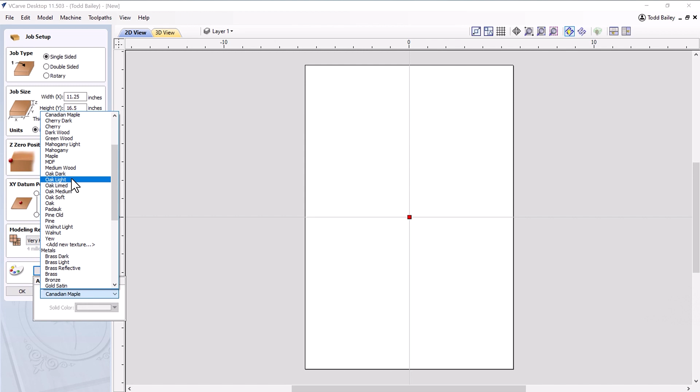Make sure we use a very high resolution, and we chose a material suitable for the material we have. We've already downloaded and installed the 12 Days of Christmas project, so here are all the bits for that.

We'll double click on the wall plaque, and scale it up just to fit inside of our job space. Next, we're going to start to lay out what we want to be in the middle of this plaque.

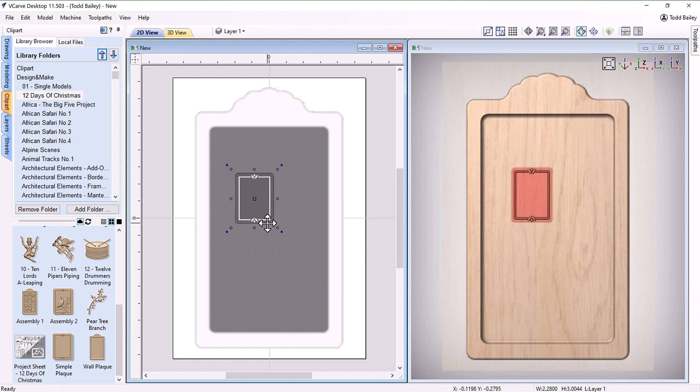So we're going to double click on the simple plaque. We're going to size that down to a point where we think we can fit about 12 of these inside that recess space on the large plaque. And that seems about right.

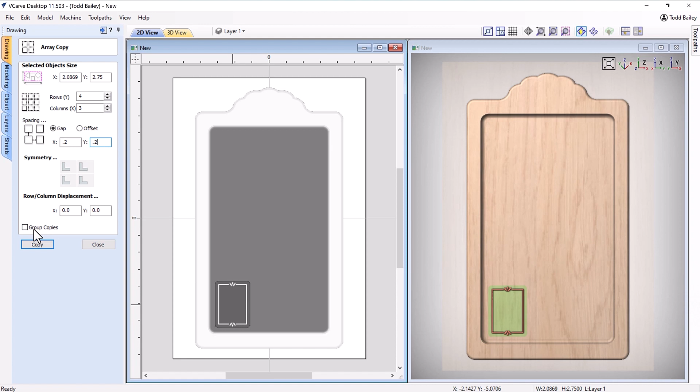So we're going to move it down to the bottom, and use our array copy tool to create a nice array of these. Make sure we group those together, and we'll click copy. Now there we have them.

Now we just need to center those on our plaque. First, we're going to select that, and make sure that it's set to an add component. That way it's actually proud of our plaque. We can center that into our job space, and then we're just going to drag it down to what looks to be about right in the center of our plaque.

Go ahead and change the shape height a bit of that, just so it looks like it fits in there better.

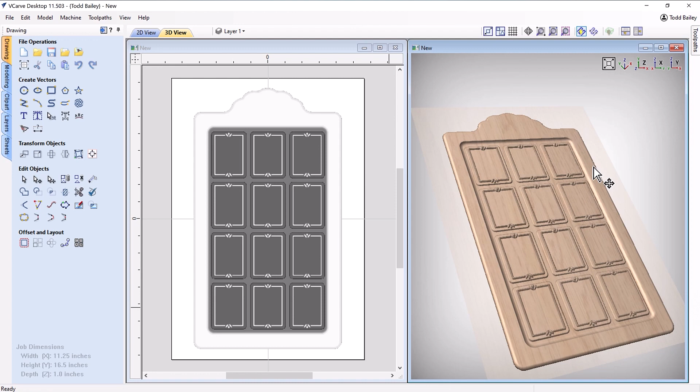Now we need to go in and bring in each one of the 12 Days of Christmas objects here and make sure that they're added to the top of our small plaques. We want to make sure that they are added, not merged in, and that they fit within inside that raised border.

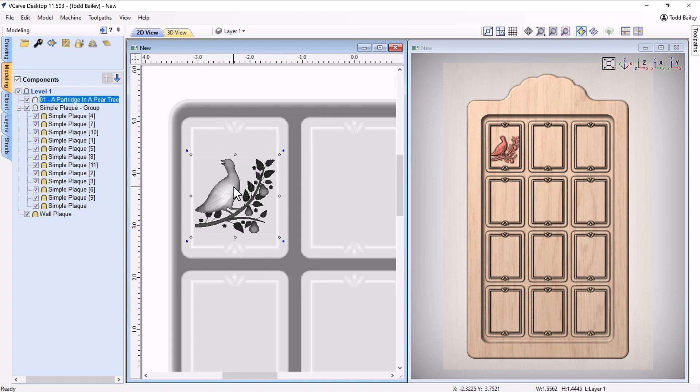And we're going to do this for each of the days. It's the same thing every time: making sure our component is set to an add component, sizing it down and fitting it on the card, and making sure the actual component fits within those borders. We're going to speed this up a little bit, and do all the other 11 of those.

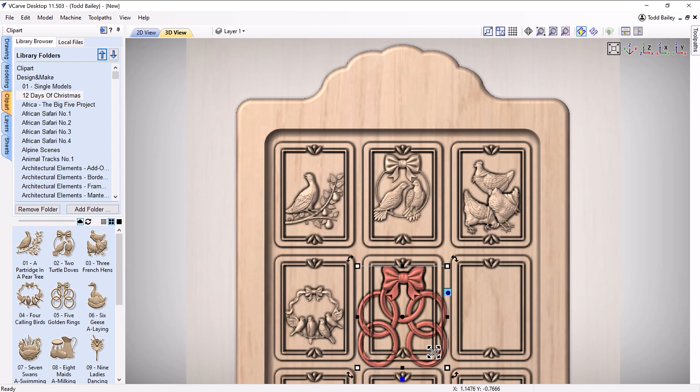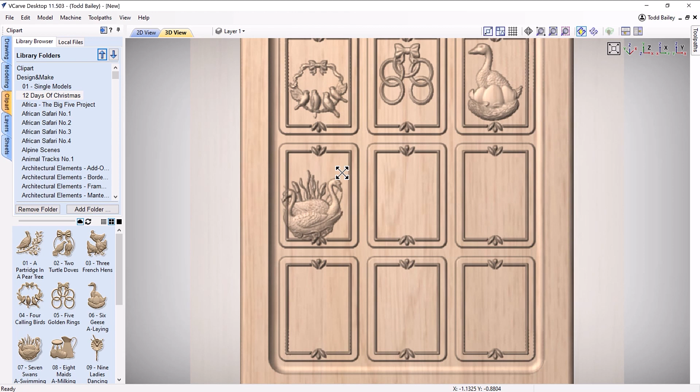As we place these on here, we're thinking about where we can actually VCarve a number so we know what day of the 12 Days of Christmas these different objects belong to. So we're leaving a little gap in spaces. Now, this takes a bit of time to do, but it's well worth it in the end.

These are all really nice models, and they can be used for all kinds of other things, not just for the 12 Days of Christmas. So keep that in mind while you're placing these where you want them to be.

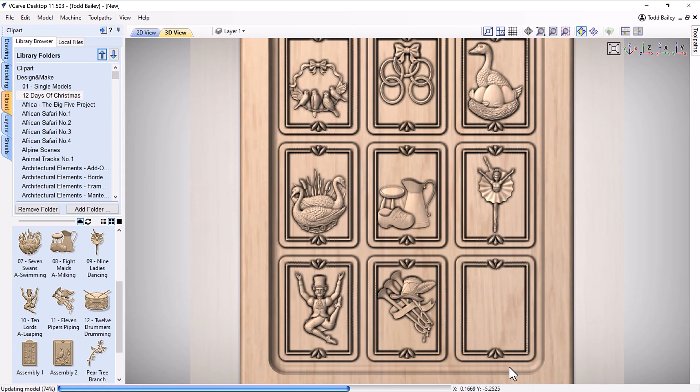Here we are, almost done. We just have 2 left to do. And after we get these all in place, we're going to make sure that the shape height of all of these looks pretty good across the whole layout that we have.

We're just going to use that new gadget that we have in our software to pull up those shape heights a bit to make sure they look really good.

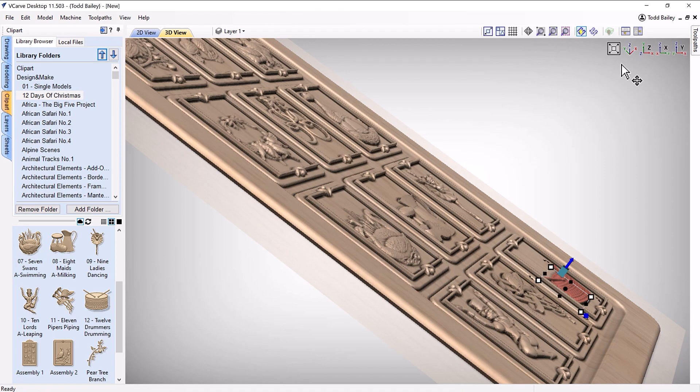Now that we're happy with that, we're going to go ahead and add in some text. So across the top, we're going to put the 12 days of Christmas. We'll type that in, place it where we want it to be.

In this case, I wasn't quite happy with that font, so we're going to go back in and choose a new one.

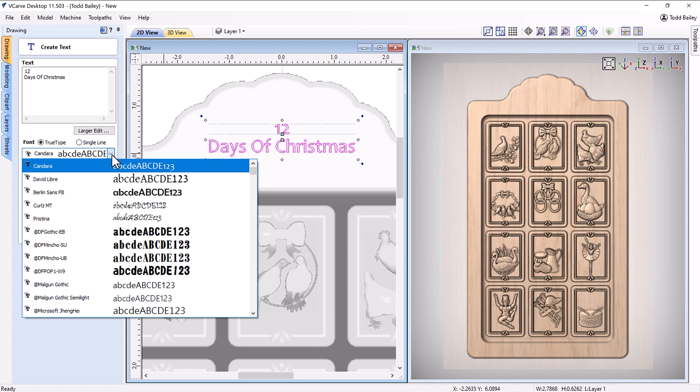One thing that's great about fonts is once you get them positioned where you want them to be, you can break them up and have some fun with the different letters, size things up differently, make them look a bit more interesting than just straight text.

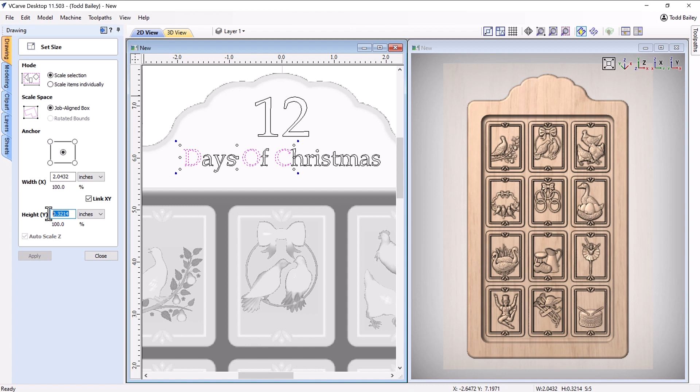In this case, we're going to convert all of this line to curves, and we're just going to size up the capital letters of each of those words just a little bit, and then we're going to nudge them back into place again. This will give it kind of a nice feel about it.

Once we get that all done, we can group it together, and then we can scale it down a bit to fit that space a bit better.

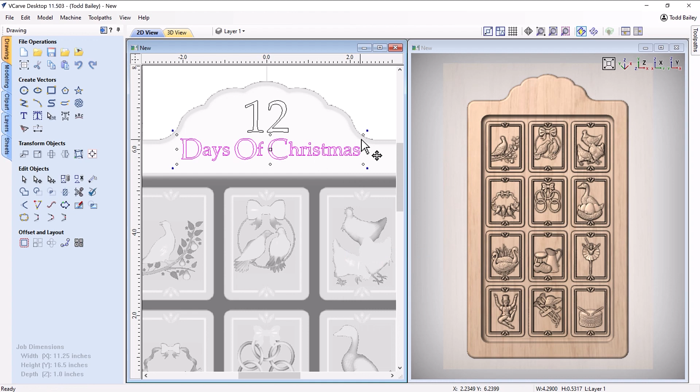Now to jazz it up a little bit, we happen to have a vector outline that we have kicking around, so we're just going to go ahead and import that in, and we can use that to add a little bit of extra detail to the top of our plaque.

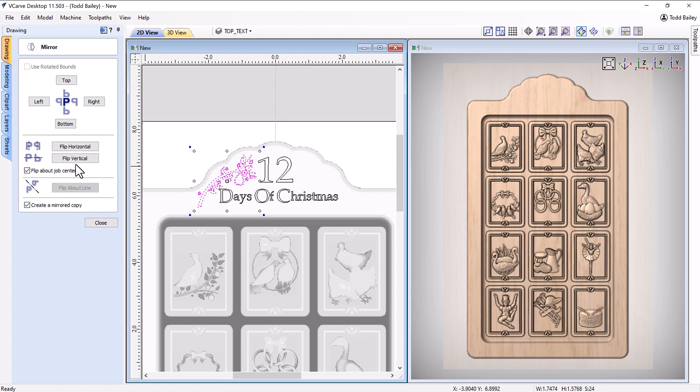You can put anything here if you'd like to, even another 3D component if you want to. We'll flip it over horizontally across our center line and add it to the other side, and then go ahead and reposition our text where we want it to be.

That looks pretty good right there. Now we need to go ahead and add in all of the numbers to each of the individual cards.

So we're going to create one number, and we'll put it in place, size it up to be approximately the size we need it for that particular card, hoping that it fits well into all the other cards.

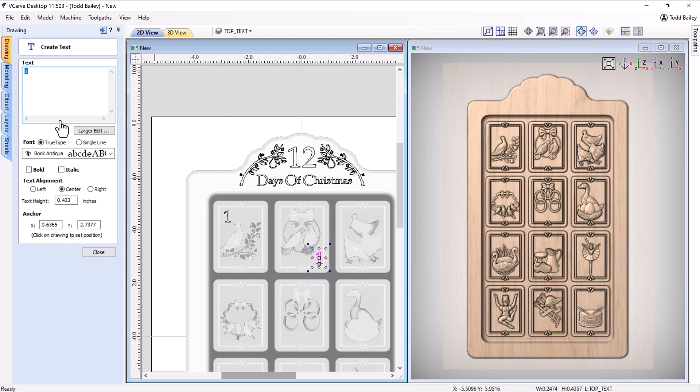And we can go ahead and adjust each letter as we go along, but there's an even quicker way of doing this if you want to. Once we have the 1 placed here, we'll copy the 1 across to every other card.

And then we can go in and simply select one of the 1s with our text editor already up, and we can just make the quick change to the proper number. You'll see that in just a second.

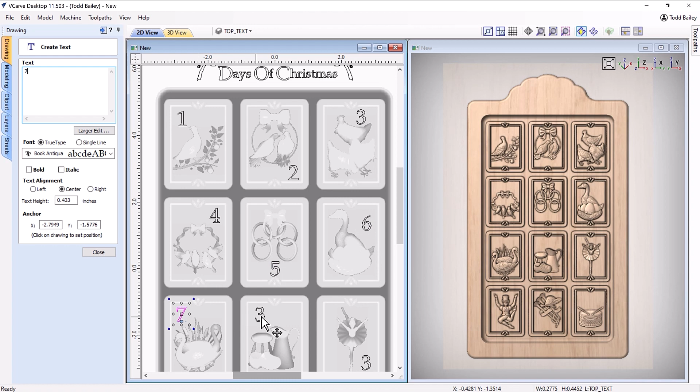So we'll grab that, go into our create text option, change it to a 4, change that 3 to a 5, 6, 7. It's really easy to do and really fast. Because the text is already selected in the create text window there, we can just start typing right away.

Now the 10 didn't quite fit, so we're going to need to adjust the Lord's Leaping guy just a little bit.

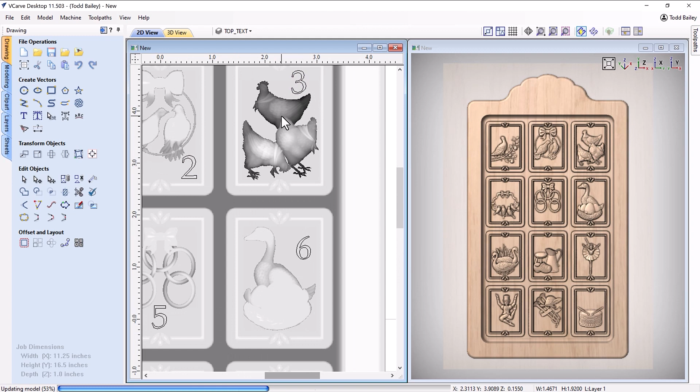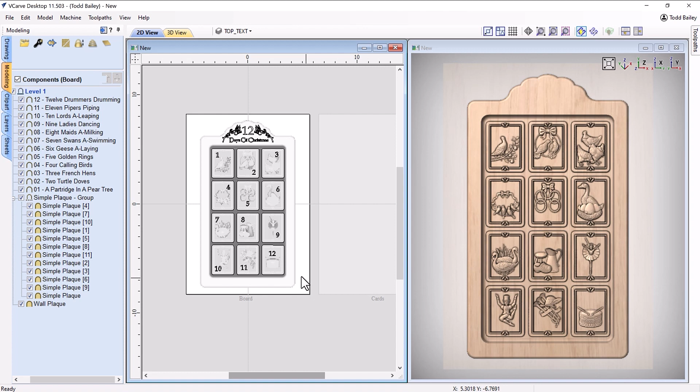There we go, we're quite happy with that. Now what we want to do is we want to go ahead and add another sheet, because we want to cut these cards separately so that we can create pockets in our plaque, and we can place these cards in one at a time. So we're going to select all the bits that we want to copy onto this other sheet. That's all the cards, numbers, and outlines.

Now all we have to do is go ahead and delete these from the board. We could have hid them if we wanted to, but in this case I had decided to go ahead and delete those out of there. I really don't need them anymore, so let's just get rid of those.

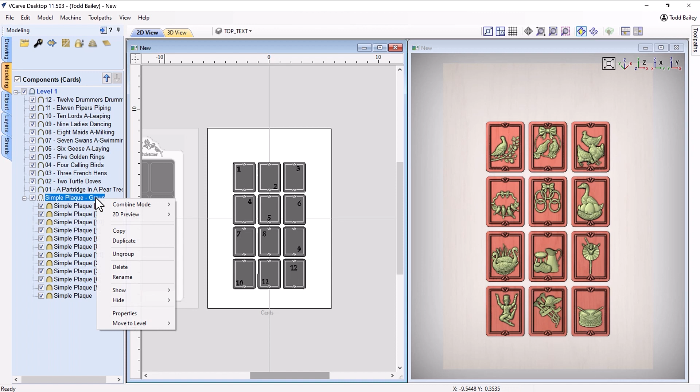Now we can go over this sheet. What we're going to need to do is space these out just a little bit. So let's ungroup all those cards and all those vector boundaries.

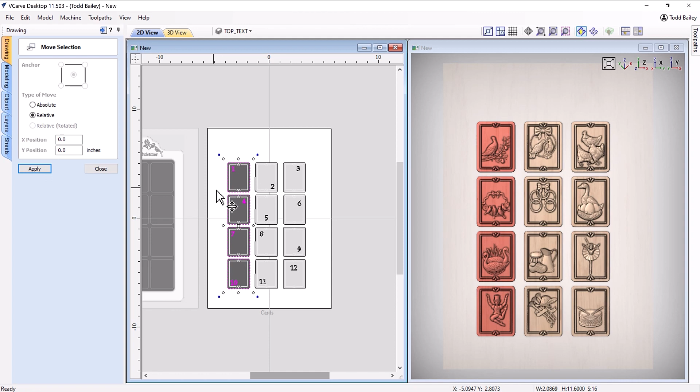We're going to use our move selection dialog here to move everything over a quarter inch, on the x-axis first. We'll do it to those two rows, and select that row, then do it to the next row. Then we'll do it down the y as well, so everything is spaced out the same.

We'll go ahead and grab all of that, and we'll center it in our job. And there we have it.

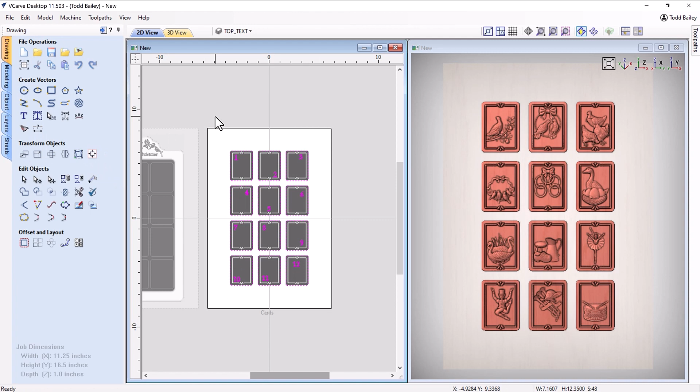Now we can go ahead and size that sheet a bit better so we have a little bit better pixel density. When we want to jam all those pixels so those models look really good into a much smaller space, we don't want to waste any in that white space around the border. And that looks pretty good there.

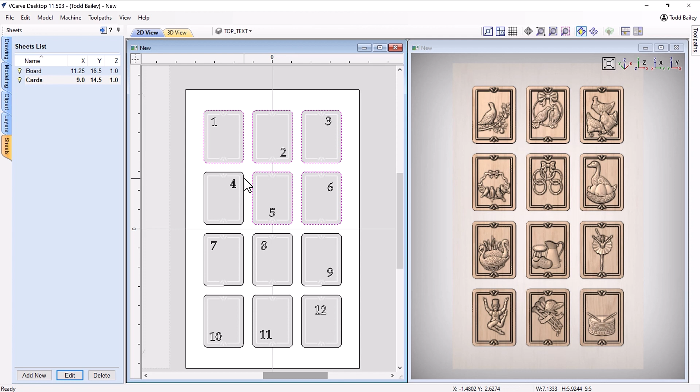So let's go ahead now and start to develop some tooling for these. We're going to group all of these outlines together. There we go, and we can go ahead and start doing some tooling. The first thing we're going to do is a quick roughing pass.

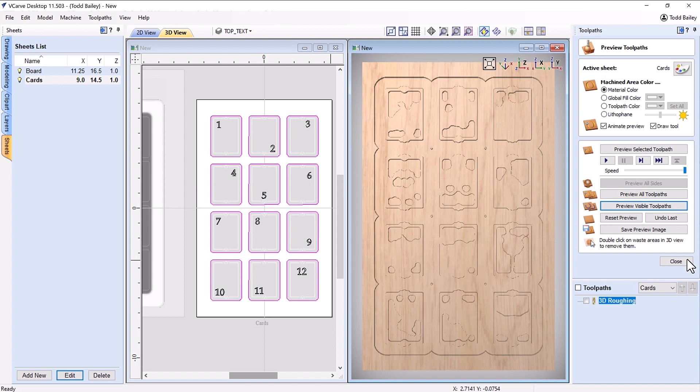Now to get rid of the majority of the material. Then we can come in with a finishing bit and get rid of everything else. We're going to use a tapered ball nose here, quite a small one for this, because we want all that detail to really shine through.

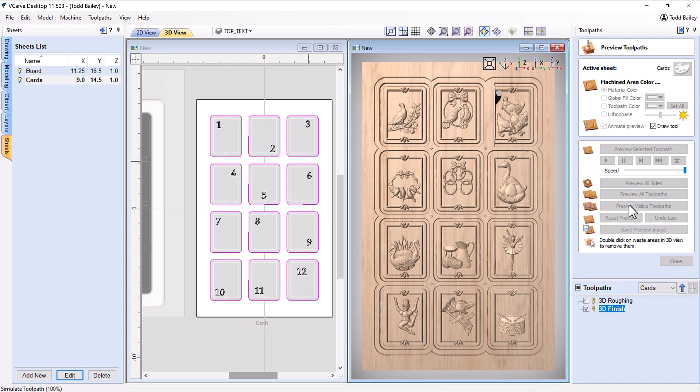Obviously we preview the tooling every time we create a tool path to make sure that the result we get is what we want. Now we can go ahead and add in some V-carving for these numbers.

Make sure that we project that onto our 3D model. We can preview that, then we'll do a quick cutout. Add in some tabs. Make sure we have enough tabs.

The tabs are going to need to line up so we don't end up losing them. So we decided to delete some out that were put in for us and move a few around, hoping the result will be a bit better. In some cases, having four tabs for each card would be nice.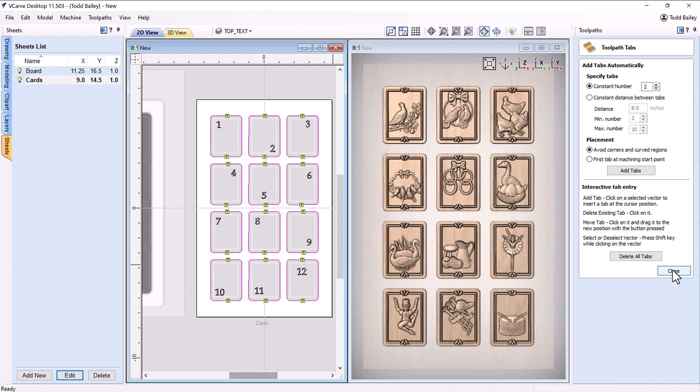We'll preview that, and that's exactly what we wanted. Notice that the tabs actually line up to hold those in place. Looks pretty good. Let's go back over to the board.

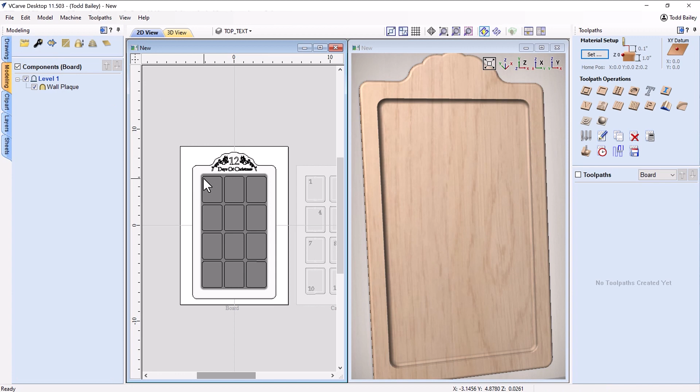We're going to need an outline border for that. We'll create that, and then we're also going to change the shape height of this a little bit, just to give us a little bit more depth in the middle of that.

That looks pretty good. Grab that outline, and we're going to go ahead and do some quick tooling here, a roughing and finishing pass. We're going to use a big old 1/8 inch ball nose end mill to actually go ahead and finish this up. Probably could have got away with a 1/4 inch end mill and saved me some time, but we're going to use the 1/8 in this case.

Because we use a ball nose, those nice curves show up really nice in the end. There we are. We're going to go ahead and create some pockets so we can insert those cards in there.

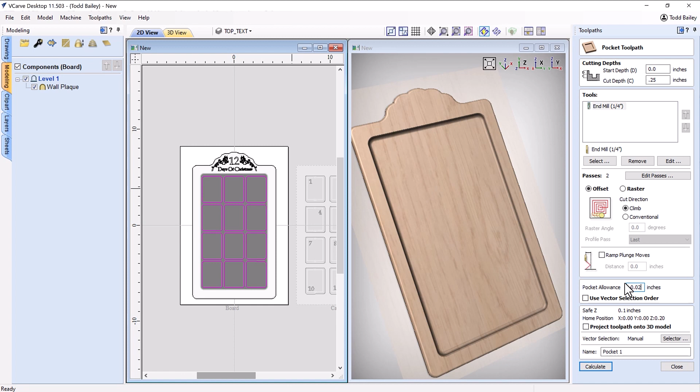And we're going to want to make sure that we use a pocket allowance to make these pockets a bit bigger so that we can fit our cards in. It's always good once you cut these pockets to do a test fit to make sure they fit in there nicely. So these are oversized just a bit.

And we'll do our V-carving on the top of that, again making sure that we project that toolpath onto the 3D model. That looks really nice. And then we'll do our final toolpath, which is going to be a profile cut to cut this out, making sure to add in some tabs.

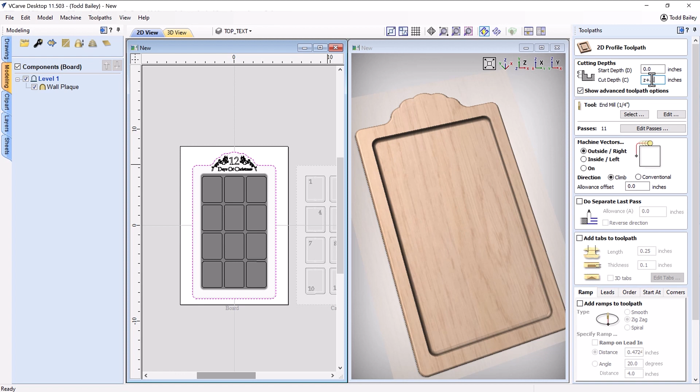And there we have all that we need to go ahead and cut out this lovely 12 Days of Christmas project.